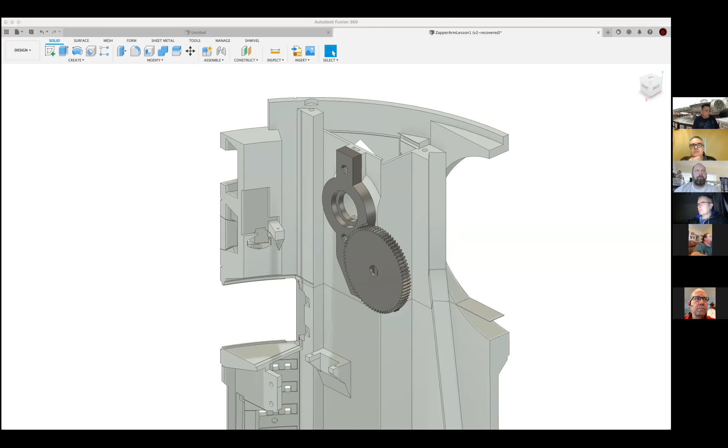And share. All right, everybody can see the Fusion screen? Yeah. All right. So this is the file where we left it before. The only thing I changed is the body rings. I just had that for context of where we are in the build. We're in the droid. And I did rename these two little pieces to magnets, because in my mind, what we were building is a little lighted zapper looking attachment that will magnetically attach to this lifter assembly.

So in my mind, we're going to send some wires through the center of this, and it's going to magnetically attach with some kind of pogo pins, and at the end we'll have some kind of laser looking thing that'll flash with lights. That's in my mind what I was designing. Whether it ends up being that or not is a different story, but right now we're just concerned on building the lifter.

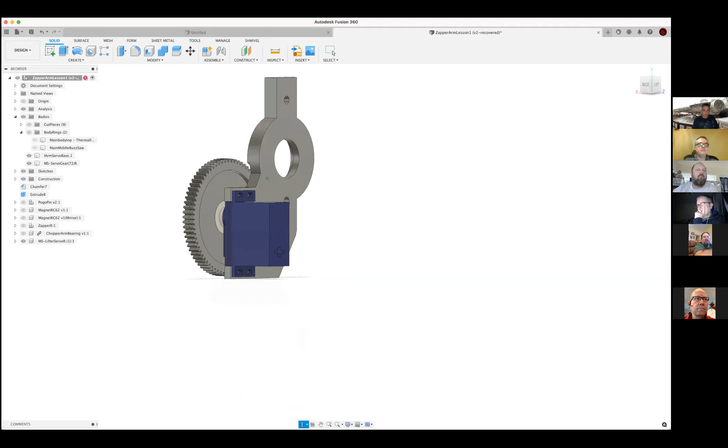So again, just as a quick recap, we have our lifter servo that we placed in here from the chopper design, and it's got the clearances set up so that gear is going to appear right where it needs to in relationship to the rest of the build. All right, so probably the first order of business is to figure out where the second gear is going to go.

And if you remember, we had a little chart that I built, with... someone's echoing. And I built a little chart with the gear teeth, and I believe it was 44 gear teeth we want on this. And let me just take a look real quick. I'll cheat and look at... yeah, 44. So what we're basically going to do is try to build this blue gear, and we'll go from there.

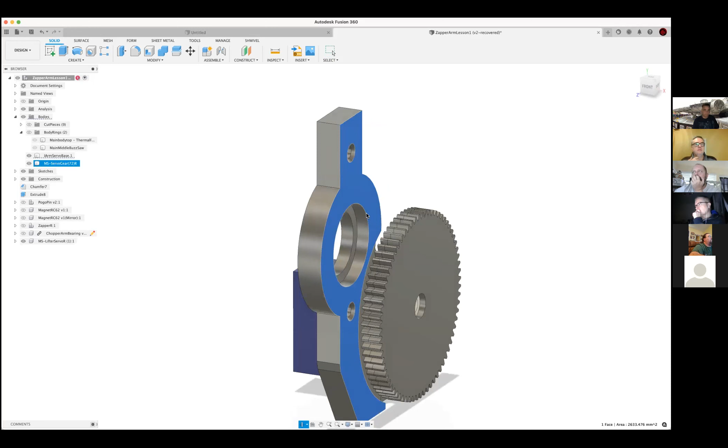All right, so where do we want that gear to sit? Actually, we know it's going to have this bearing here. So we want the gear to sit with a little clearance off of this surface here. So I'm just going to put my offset plane off that surface and say, well, 3 is probably too many. Maybe 1.5 millimeters is where I want that gear to sit in relationship to the other.

And what that does is it's going to be a slightly thinner gear, and it's going to mesh with this bigger gear, and it's going to have a little wiggle room there in case it's not perfectly aligned or perfectly flat because of the inconsistencies of 3D printing. So how do I make a gear? There's lots of ways of doing it. You can go on the internet and learn about all the math, or you can skip to the easy part where they give you tools that are built into Fusion. They're not great tools, but they work.

So if you click on the Tools tab at the top and you go to Add-ins, Scripts and Add-ins, and scroll to the bottom, you'll see there's 2 ways of putting a spur gear into your design. Here's a little caution. If you click on one of these and then try to run it, it's going to crash Fusion, because right now we're in something called direct modeling. It likes to have a timeline. So to do this, I'm just going to go to Capture Design History. Don't worry, I won't leave it on long. And you'll notice we get a little timeline show up at the bottom.

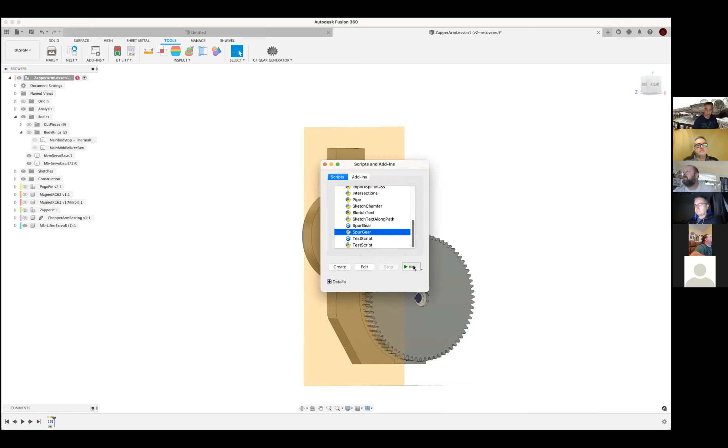So now when I go to my add-ons or add-ins, and I haven't found a functional difference between the two, but let's just say we'll pick the bottom one and hit run. And that brings up this little dialog that creates a spur gear. If you recall from our module before, I'm just going to use a module 1 because I know the other one has used a module 1. I'm going to use 44 teeth.

Backlash, I'm not going to mess with. Gear thickness, let's go with 10 millimeters. And the hole diameter, I'm just going to use that as a place marker right now. I'm going to drill the hole to something bigger. Let's just go with 3. And you notice I get a little error here. It says the root fillet can't be bigger than that. So if you're asking it to do a root fillet that's bigger than the teeth size, it has a problem.

So if we look at what it's about to generate here, it says pitch diameter is 44 because my module is 1. So I'm not doing any scaling here. I'm just using the 1 millimeter metric, and it's going to mesh because my other module is also 1, and those are required if you want your gears to mesh. And the pitch diameter is 44, and this one was 72, if you recall. So you take the radius plus the radius, and that's how far apart the centers are going to be. All right, so I'm just going to hit OK, and voila, it makes me a gear.

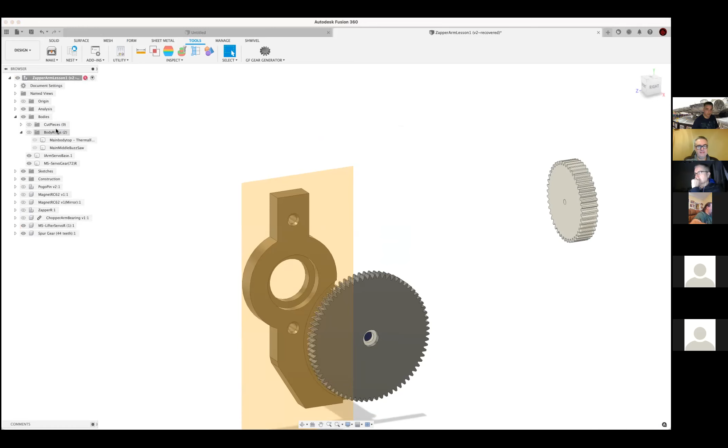You can see it appears just randomly wherever it decides that gear should be. And now, just to stay in step with everything, I'm going to go do not capture design history, and then it's going to erase my timeline, and I'm back into direct modeling mode. All right, so how am I going to get this gear over to here? Well, probably the easiest way is to go back to the solid workspace, create a sketch. We'll sketch on this plane, and for some reason Fusion likes to spin it. And then I'm going to go project include, which is the P key, and bring that geometry in. Finish sketch. And then I simply go to modify align.

And right now it's doing a component. You notice it says spur gear 44 teeth. See, it's got this little dot here. This is a component as opposed to a body. These are bodies inside of this project, and you can think of a component as a full project inside of another project. So it's like a sub project. It has all the pieces that a regular project does, like an origin, bodies, sketches. It has its own extrudes and patterns. And I like using components when I'm making complicated things because it keeps all the business of making that part contained inside the component. You don't ever have to use components, but it will make your life easier and more complicated at the same time.

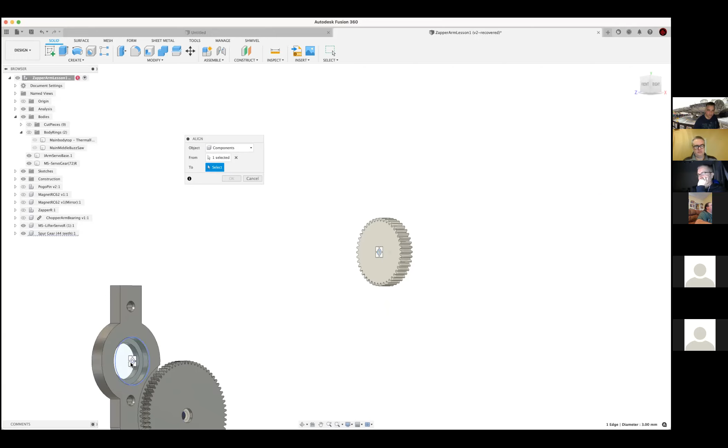All right, so object component from, and you have to be very careful of where you're picking on this thing, because whatever you pick is going to be the alignment spot. So you can see I can pick the cylinder, I can pick this ring, which is what I want right there at the center, and this little circle shows you the actual thing that's getting aligned. And I want it aligned to right there. And you can see that it easily brings it in and aligns it right to where I want it to be. If we zoom in here, it's not quite spun correctly, but that's fine. That's more cosmetic at this point.

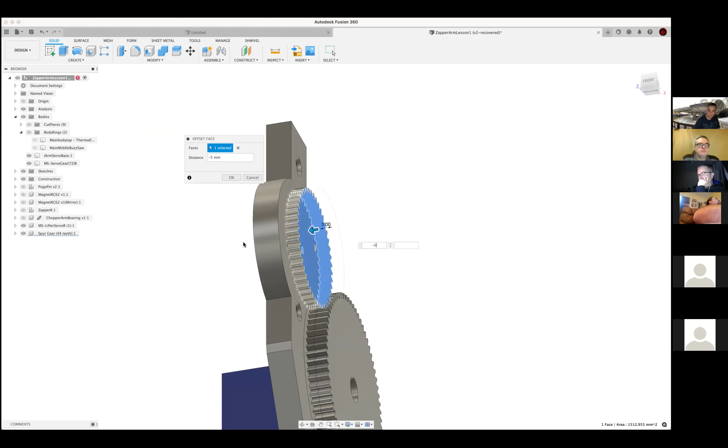But just to make it look pretty, let's spin this a little bit to make the gears mesh. Oh, because it's a component. And there we go. All right, so that looks a little thick to me. So I'm going to hit this face here. And you can hit either extrude or offset faces. I tend to do offset faces because it'll preserve the geometry. But we made it 10. Let's go with -5. That's too much. That's fine. -5. All right, so that's our gear.

And right now it's a component. If we didn't want it to be a component, we can just suck the body out. Let's name this spur gear 44. I could just pull it up into my main build here. And now I've got that body that I can work with if you didn't want to use a component. But I'm just going to leave it down there for now. So I'm going to do undo paste. And now that body should be back in here. There it is. All right, so we'll just leave it there. I'm going to turn that off for now. So that's where the gear is going to go. I'm going to turn off this sketch.

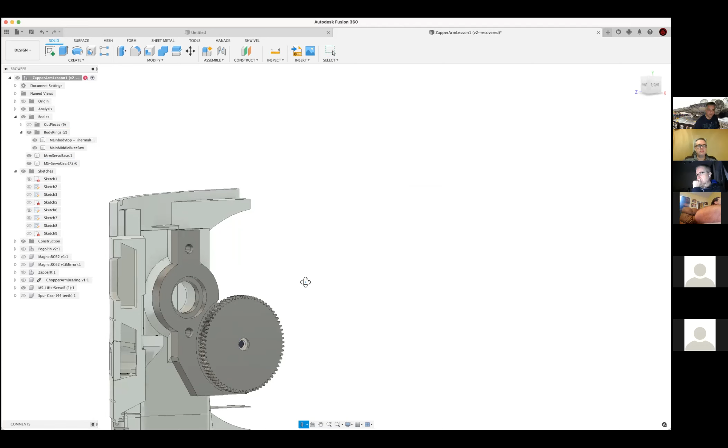But what's that gear going to ride on? Well, it's going to ride on a shaft that goes through here. With the loads we have on this and the plastic build, you could just use this as your bearing. But I found that you can get a little wobbliness in it because you make it enough clearance so that it rotates smoothly without dragging. Then it has enough clearance that it actually wobbles a little bit. Then you can have issues with it clearing your body door when it wobbles on this dimension, this plate here. So I'm going to attempt to solve that problem by putting in a bearing.

Now you can buy bearings, obviously, but in this case we're 3D printing, so we're going to 3D print our bearing, and we're going to get an advantage of that because we won't have to house the bearing inside this device. We're going to have this device be our bearing.

So Tim's question from John is, do you make the smaller gears thinner so it fully meshes with the larger one? Let me see if I can read his question. I think he means the thickness of the smaller gear is thinner than the larger one.

Yeah, the reason I chose to do that is these are out of plastic. So if these gears aren't perfectly aligned, I just want to make sure that the top gear has plenty of target to miss and still hit the gear, if that makes sense. It's just a matter of design clearances. If this was made out of metal and everything was perfectly aligned and mounted with precision, ideally these gears could be the same width.

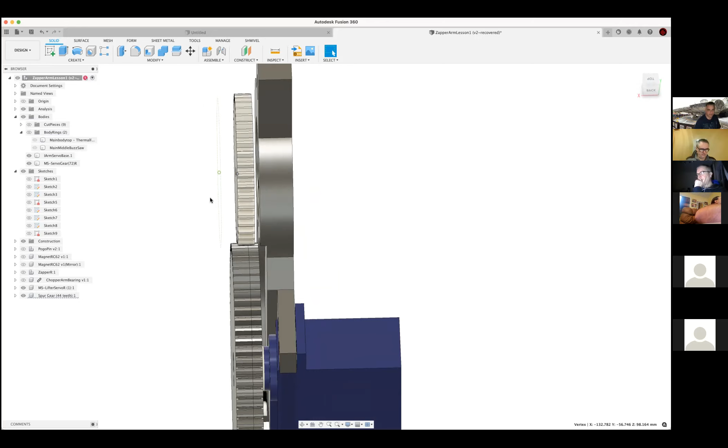This is allowing you, say when you put it together and didn't glue it quite right or whatever, it gives you a little wiggle room in the assembly process so you can still successfully put this thing together and have it work without being super precise.

So that's a built-in clearance or variability I'm allowing the design to have. Certainly I could make them both the same, but if you look at the construction of this bigger gear, what it really is is housing this servo, and I run out of space here. So I have to have this bigger gear sit proud of the servo, and then when I do that, it's too thin. You can see this little space here where I added this much back to the big gear. That gives me the clearance, because otherwise I would have to push this whole gear further out.

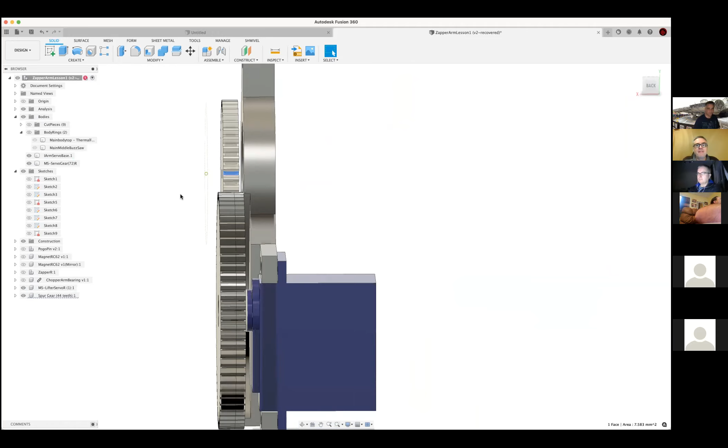And that impinges on the clearance inside the droid, like my card dispenser and chopper, perhaps. So it looks like we have a lot of space, but we really don't. I'm trying to conserve the footprint size of this overall build so that it's as small as possible, but still big enough to make it easy to assemble and use. I think that answers the question. I think it does. All right.

So somewhere in here is my chopper bearing. I'll point out this is a component, and when I click on it, you can see I have a little link here, and I have a little tool, a pencil mark. So what this means is this file is actually physically linked in my design workspace to the original chopper bearing.

So I can't edit this bearing at all at this point. If I did want to edit it, I could either open the original file or click on this little pencil. You can see it takes me into sort of a sketch mode where now I'm actually editing, and you can see that this has its timeline. This component was built using traditional Fusion timeline techniques. Then when I'm done, I end my edit in place. So if I needed to manipulate it, I certainly could.

But what I'm going to do instead is break this link, because this piece is going to get chopped up, and I don't want a reference to that original file. It's never going to be friends with it again. All right, so I just brought it in, and when I brought it into the project, you can see it's not sitting anywhere where it needs to be, and we have a few problems to solve.

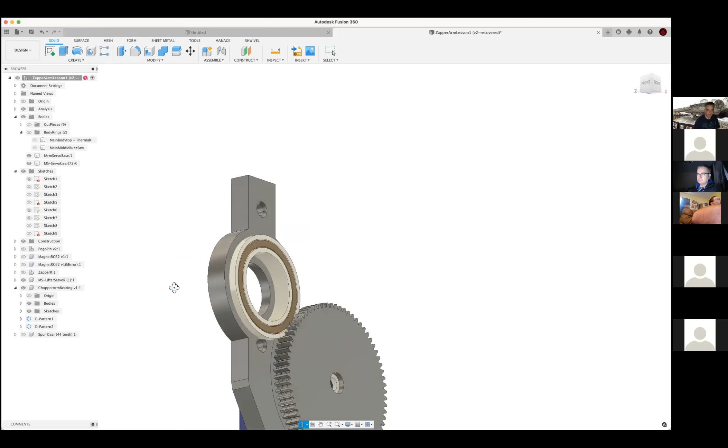So problem one, if we go to inspect from here to here, we can see that's 9 millimeters across. If I go to my place where I'm trying to put it, and inspect, it's 10 millimeters across.

So I've got a millimeter that I'm happy I have an extra millimeter of clearance, but if I just align it, it's not going to be in the center. So two ways of solving that. Probably the easiest is to align it to the center of mass, but that's more complicated. Probably easier is just to add 0.5 millimeter on both sides to make it a total of 10. So that's what I'm going to do.

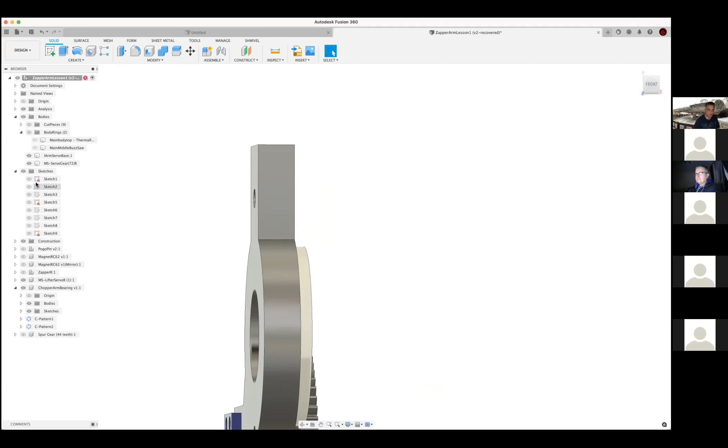I'm going to take this face here, hit Q and 0.5. You can see it grows. And on this face, I'm going to hit the alternate key to select more than one. Maybe the shift key? No, I'm using a Mac computer with a Windows keyboard, and for me it's the Windows key, which is weird. But anyway, there's whatever key it is on your computer that allows you to select more than one. You can see it's going to grow. Control, thank you, on the Windows machine. So now I've grown this by 0.5 millimeter.

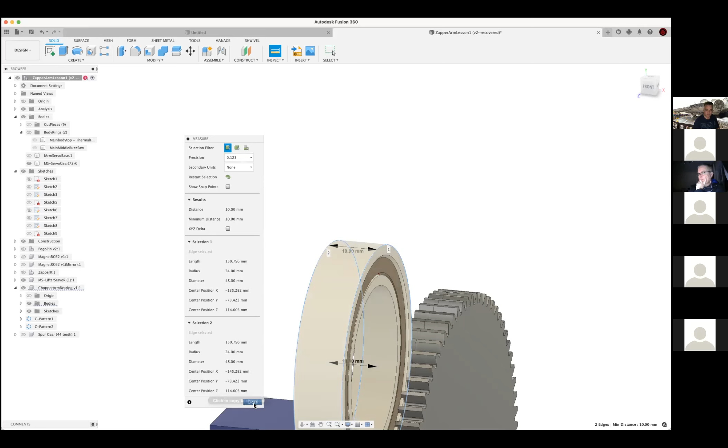I'll just double check my math real quick. I always do that to make sure I didn't fool myself. So now the bearing housing is 10 millimeters. That matches my base. So now I'm going to go to this component, chopper arm bearing, and go to align.

I'm going to turn this off, and I'm going to align this. You can see it's the center of that arc, and it really doesn't matter when you're talking circles, that's the center of the circle. And now you can see that part is embedded happily inside of the mounting bracket. So I'm happy with that.

We'll hit OK. And obviously the mounting bracket has an issue in that it doesn't have a hole for it. So let's fix that. Probably the easiest is to go to split body.

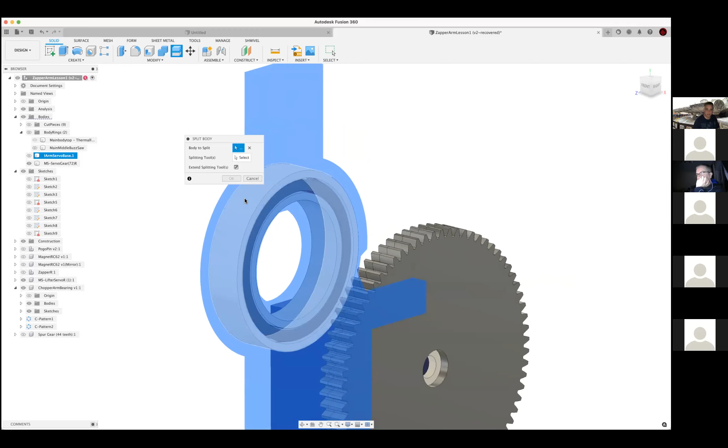And the body to split is our servo base. And the splitting tool, I'm going to turn that off for a second, is going to be this. And you can see what that does for us, let me turn this back on, it's going to cut a hole into the base. And I've got extend splitting tool.

So now, every time I split something, I always look and see what happened with my body count. And you can see that I added a body, because that makes sense, I've cut this into two pieces.

So let's turn off our gear so we can see what's going on. And there's my new spot for that bearing to live in.

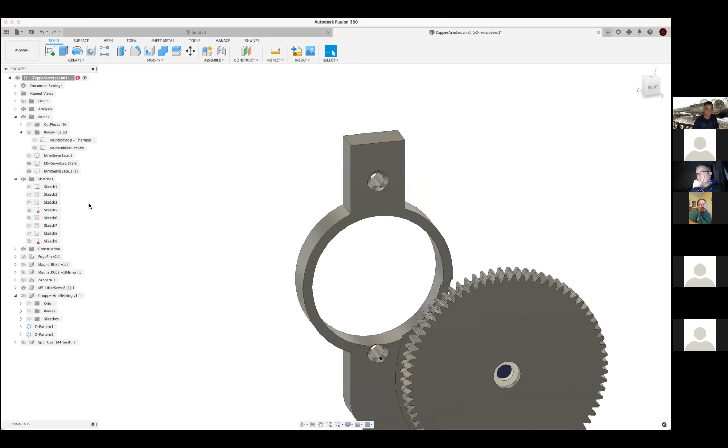So unfortunately, it chose the little part to get the appended name. So let's just delete that, I'll leave it for now. I don't think I'll need it later, but I'll just leave that for now and turn this chopper arm bearing back on. All right, so that's looking good.

Next thing I'm going to do is combine my servo base arm with the outer race of the bearing. And I'll hit OK. What I did was I merged this bearing piece into the servo arm, and you can see the end result is this outer race is now built into the servo arm, and that's going to be the basis for our bearings.

And just a little quick preview here, let me turn this cage off. You can see the bearing's going to live in that little space right there.

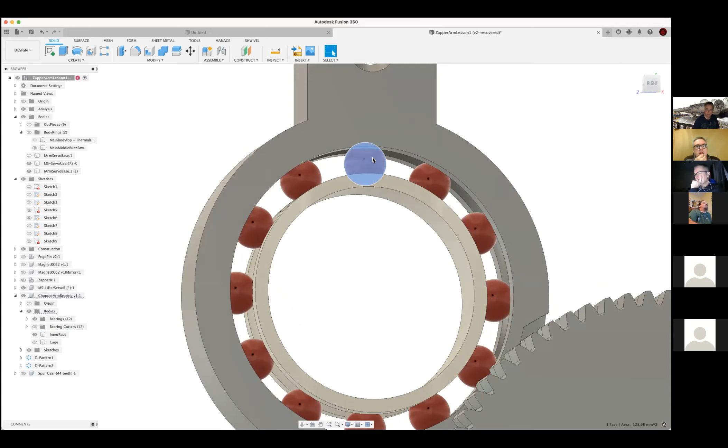Just a quick aside, a little sidebar. We're not going to talk about building the bearing, but these are just 6mm BBs that you can buy that are very precise. I took a bearing that is a metal bearing, and I looked at the clearances of how that was built, and I just mirrored that. It works really nicely when you build it in plastic. And I have a video of how to put this together because it's not entirely obvious.

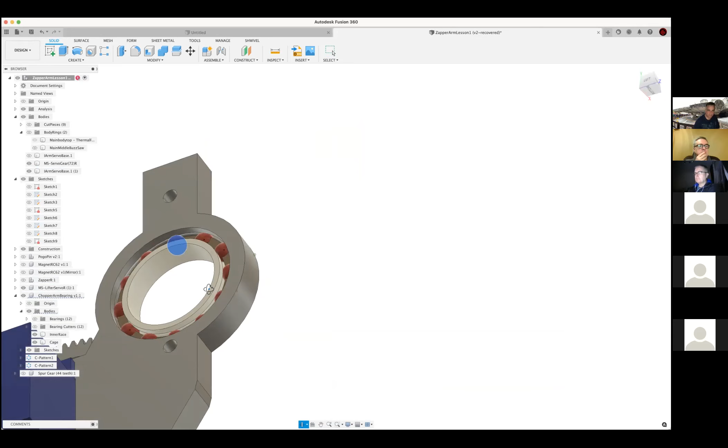All right, so I'm going to turn these bearings off, those are bearing cutters, bearings. I guess you have to kind of snap that together, do you? Yeah, basically what you do is you cover one side so the bearings don't race all over the table, and you start packing them into these spots. Eventually you put them all on one side, so they're not evenly spaced, they're all kind of bunched up, and you can snap them in. Then once the final one is snapped in, you start rotating the center, and they kind of start spreading out. And this cage isn't fully the length of the bearings, it's just a little bit over the center diameter, and this will actually snap in and hold those in their relative positions. Right, with it, yeah. All right.

So now that we've got, oops, let's turn that cage off, inner race off for now. And where are these bearings? Find in browser.

Oh, there we go. I was just wondering why it was so hard to get rid of those to go invisible.

All right, so let's go back to our spur gear, and we'll see if we can find that a home. So the way this is going to go together is that this chopper arm bearing is going to be connected to this gear.

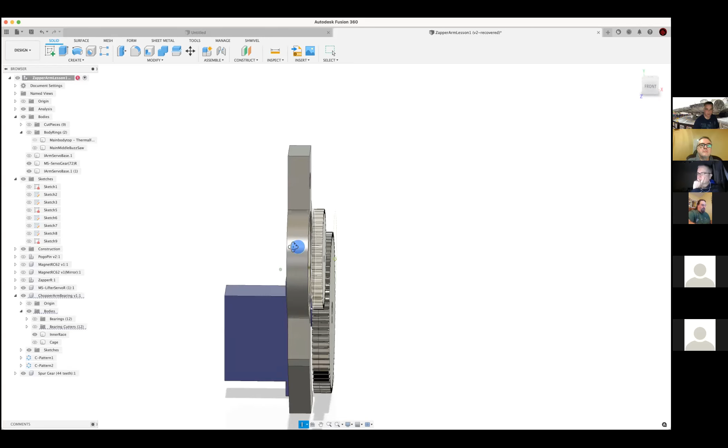Now we can either screw it to the gear, which is probably preferable when you're trying to put this together, or the gear could contain the shaft that this inner race, so we could physically connect it. And if I were to print that piece, then I would install it from the inside of the droid, and then that'll probably work. So let's just go with that for now.

So what I'm going to do is turn this off. Turn this off for a second. I'm going to grab this face here, and now here's where I like to use offset faces.

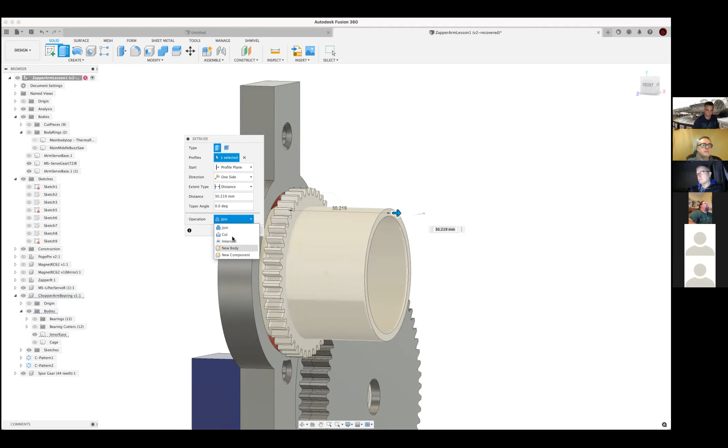If I use extrude, it's just going to make that thing bigger. And if it touches anything like this gear, it's going to want to join or cut or whatever these objects are, which could be fine, but it may or may not be what I exactly want.

Whereas if I use offset faces, I just find I have a little bit more control over what's going to happen with the relationship of these pieces without doing things I wasn't expecting. And what I mean by that is, if you go too fast with this and you start extruding things, you'll either cut things you didn't mean to by accident, or you'll join bodies that aren't supposed to be separate bodies into one body by accident.

It can be a time saver, or it can be a nightmare if you don't realize it happened until two hours later and you're like, why are these two pieces connected? When did I do that? Where if I'm doing this and I explicitly join them together, then I'm going to be better off.

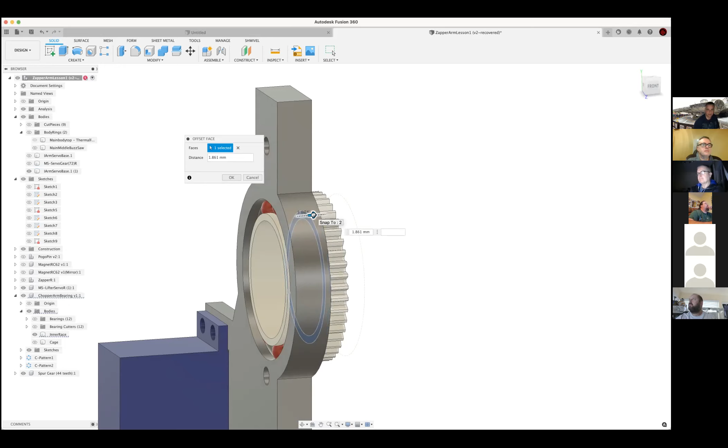So I'm just going to use this technique and just drag it towards the direction you want to go. And then I just touch the face, and then it will exactly snap to that face.

And now we're going to do a modify or a combine, this gear with this inner race, and voila. So it disappears out of my chopper bearing, and it becomes a single solid piece of this spur gear. And I'll check my bodies to make sure that it actually did what I wanted it to do.

In fact, while I'm down here, I'm going to turn these sketches off. I don't like that little dotted line. All right, so now I have a piece that will become the basis of the rest of the build.

So let's kind of review where we're at. The bearing is going to act as the hub of rotation for this gear. The servo is going to act as the hub of rotation for that gear.

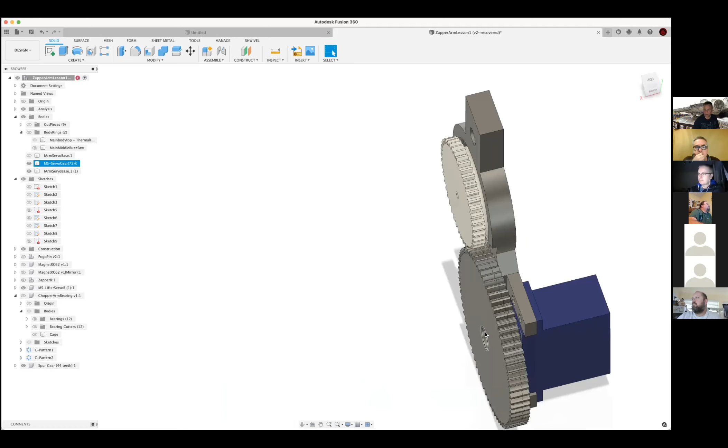And I made it look easy, but I did the math. I actually have a sketch in here somewhere, I think, there it is, where before I determined all this, I worked out the math on the size of these two gears and the distances between these hubs, because this distance and these circles, these pitch reference circles, you can see what they are is perfectly tangent. And the length of this line is the radius of this and the radius of that. And that's how far the gears go apart, plus or minus a little bit of clearance.

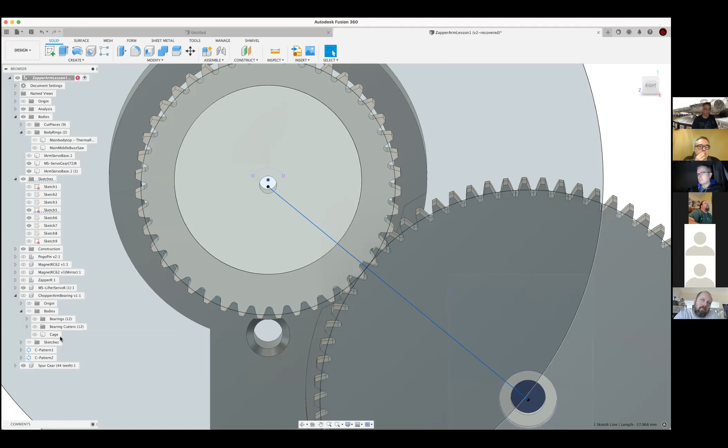Because anytime you're working with anything mechanical, you're going to have clearance, because otherwise, if you get them perfectly aligned, then they're going to be too tight. They won't function properly, or you'll put undue stress on your servo. All right.

So this little ball bearing here, that's the only thing left of the, and the cage, are the only thing left of that bearing from Chopper's arm.

So now we've got the lion's share of this work done for having this lifter do its job. The rest of the design is going to be: what's the lifter going to do, and how are we going to get this rotation through this hole and into the area over here.

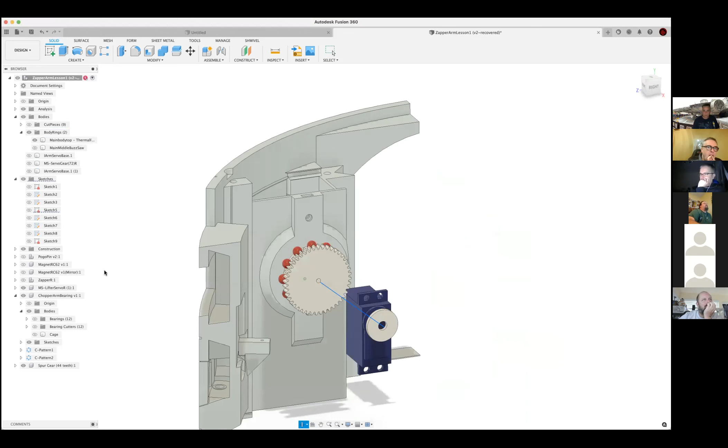Well, let's take a look at our hole and let's see what we're up against. Servo chopper off. Turn my spur gear off.

So the way this is designed is it's got two captured nuts. One comes, they're both coming from the top, and probably an M4, if I recall. Screw is going to mount that in. So let's take a look at this.

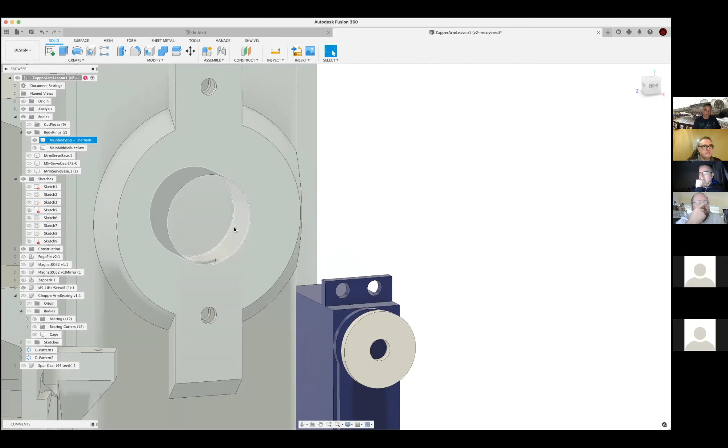Inspect. The diameter is 25. So whatever we're going to put in here has to be smaller than 25. Maybe 24. That'll give us a healthy amount of clearance on both sides, so it shouldn't rub, even if it's not a perfectly smooth print. And it'll give us a little wiggle room when we're actually mounting it, so that we can maybe work an angle.

And if we go as small as 23, that'll make it even more easy to assemble. We don't have to worry about our whole assembly wiggling, because as you recall, we're running on this bearing here, which is going to hold it in a pretty good orientation. But let's take a look at the relationship of this to this.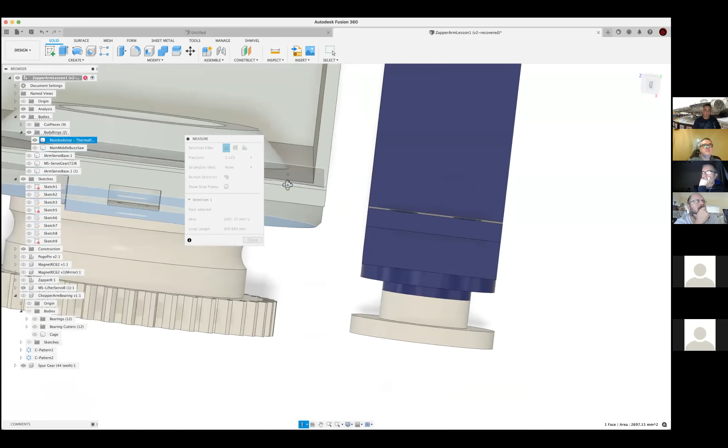That's a little bit tight, I think. Actually, we've got a millimeter of clearance, I think. Let's see what it is. Half of the problem of working with Fusion is it's only 0.5 millimeter clearance.

Let's make that a little bit more. So I'm just going to hit Q, minus 0.5, and just pull that in a little bit, so that this is not going to rub in with our body. Oh, that's my old servo base. I'll eventually delete that.

So right now we've got clearance between the spinning part and the static part in our build. So let's take this, and again, I'm going to hit Q. When you're working with circles, the number that comes up is the radius of what you're designing. So if I wanted it to be 10, that's going to give me a diameter of 20.

Inspect. See, so it can be a little confusing because most other times you pull up the Q key, you're going to get a direct number, like if you want to come back 3 millimeters. Usually what I do in that situation, if I know the exact clearance, I'll just use this and do the math right here. If I want to come in 1 millimeter or half a millimeter, you can just do the math, and you can do times 5 — it actually does the math for you. So it's really nice and handy to just type in easy equations when you're doing your work.

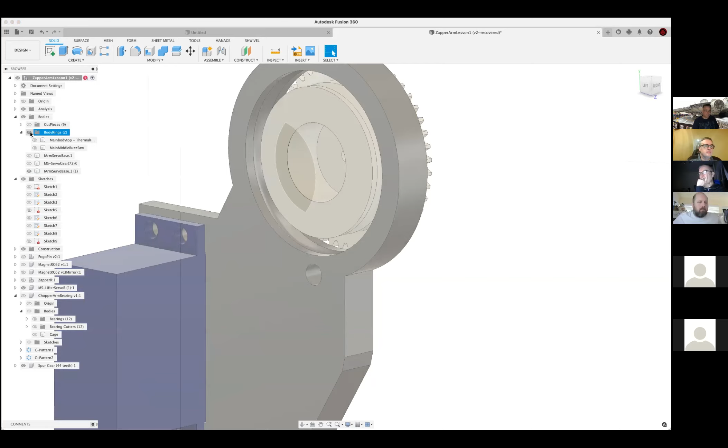So I'm going to leave this central spot open pretty much right now because I don't know exactly what we're going to do with this space, but I do know I need to get my motion translated through the walls of... where is it? Body rings. Oh, I turned them both off. I want to get the translation in through this hole.

So let's start with a sketch. Turn this off. We'll do a sketch right here. Create sketch, and we'll draw a circle based on the center here. Circle, C key, and we said our radius was 25 — let's go with the 23. Finish sketch.

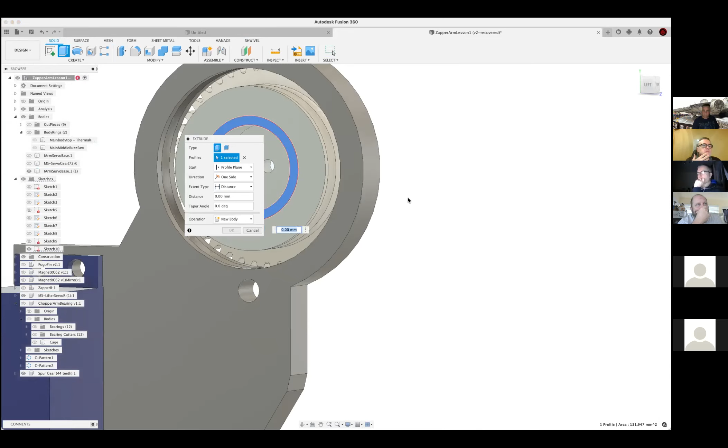So how far out does this go? Well, let's take a look. Somewhere in here, we know it has to go at least to here, which turns out to be 14. And then again, if I know I needed a 1 millimeter clearance as a minimum, I can just go plus 1, or whatever — say that wasn't exactly 14, say it was 14.358, whatever — I can just straight up add the clearance right there in my extrude command.

So, just to stay in good form, I'm going to take this and join it to that. Again, this is kind of an optional thing — you don't have to work that way, you could have just gone with a straight extrude. And I'm going to bring this into -3.

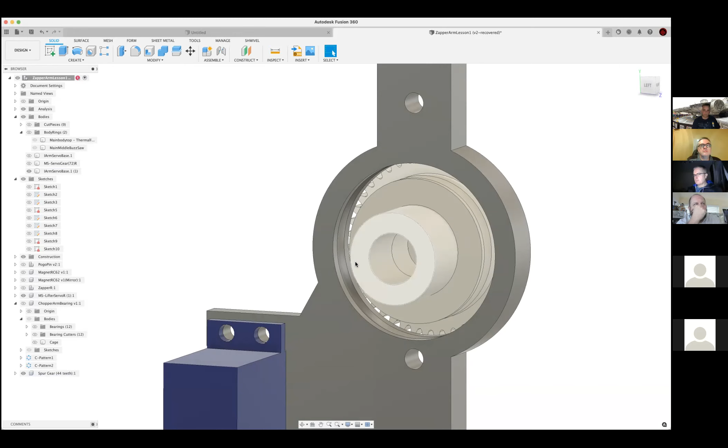So whatever we're going to pass through is going to have to go through this little channel here, which is 13 millimeters. That's pretty good. You can fit a connector with a grabber or whatever. You can fit through this hole here. Let's see with this.

All right, so anytime I'm looking at a body, I look at the detail of what is built into it. You can see I've got a face here and a face here. This should all be one face, and you can certainly leave it as is. But if you can get rid of this one, it's going to be less computational power and just a cleaner model. I kind of like keeping as few faces, or in this case, boundaries as possible. And that's just a little housekeeping thing.

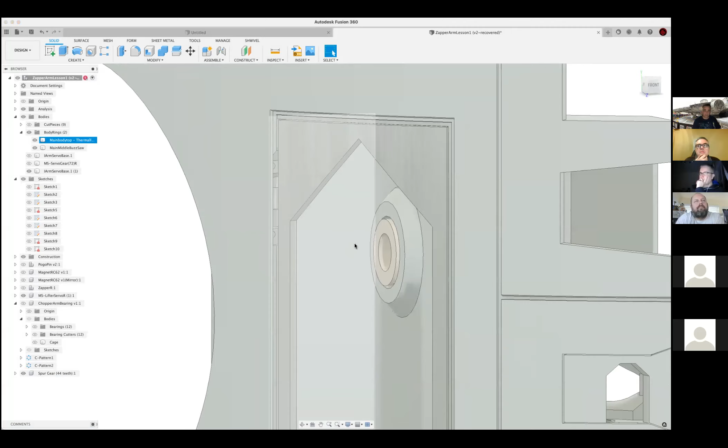All right, so let's take a look at where we're at. Now, how are we going to get this into a tube? Well, we have to have a surface to draw on, and we have to have a kind of a concept of how big our thing's going to be. So let's try to do this. Body rings off. Create sketch. Let's sketch on this surface here. And I don't know why Fusion does that, but it annoys me.

All right, so now I'm just going to bisect the center of this circle and use that as a basis of the rest of the design for the tube that's going to be the arm. So when I draw this, the things I'm paying attention to, you notice these little dots here, those are constraints. If you look up at the top, these are called coincident. So that line is coincident with the center of the circle, which is what I want. This one is a horizontal vertical. That's also what I want. I don't want some weird angle. And then this one's coincident with that. So that's half of what I want.

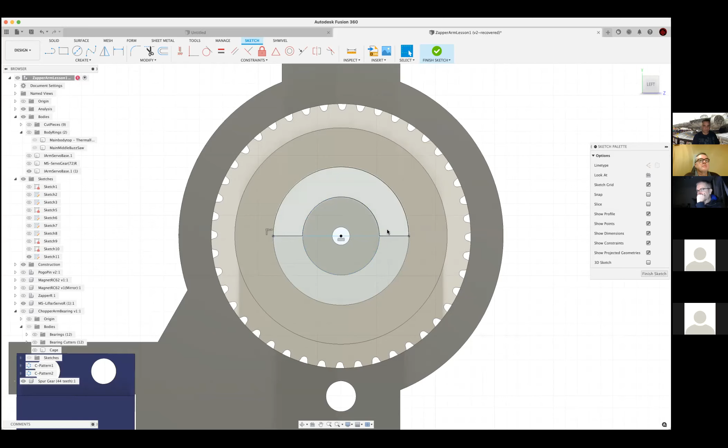Although I could use that, I'm going to extend, modify extend. And you can see now it's going to build a line that's centered on the center of the circle and goes from this tangent point to that tangent point. And that's exactly where that line is going to behave itself. And I'm going to leave that there.

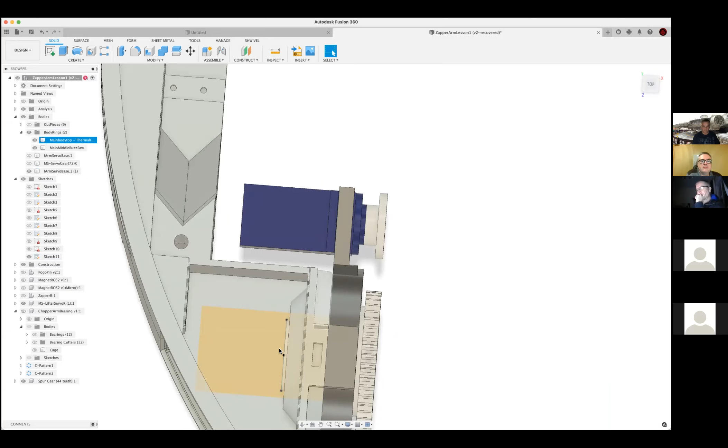And what we're going to do with that is I'm going to go to construct, plane at angle. If I can find it, here it is, plane at angle. And the line I'm going to select is this one. And it just so happened it came up with perpendicular, which is what I wanted. But if it didn't do that, I could change the angle here. I'm just going to leave it as is. And here's a little fun thing. I'm just going to drag the corner of this plane out a little bit. And that's just cosmetics, just to give myself a representation of how big a space I'm working with in my lifter. So that kind of bullseyes the center mass of that chamber.

So now we're going to put a sketch here. And again, it spun it for unknown reasons. One more. There we go. So now we want to build a tube that's kind of centered on this line here. And the center is the center of that circle. So first thing I'm going to do in my sketch is select that line and project that geometry into my sketch so I have that as a reference.

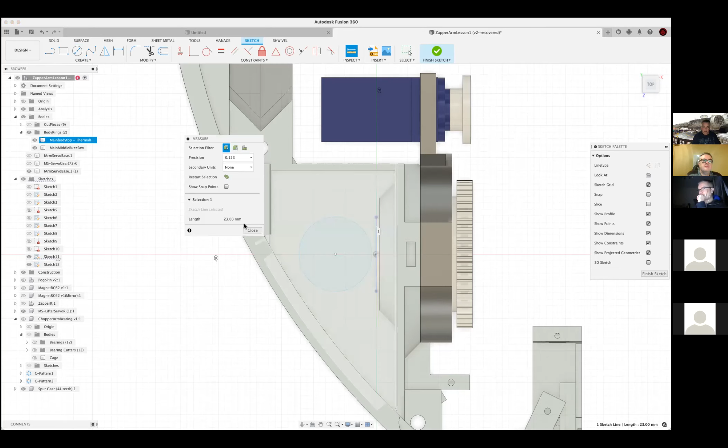And we're going to draw a circle, although we don't have to draw a circle. This zapper could have anything, but it seems like they use, for the most part, round tools. And I'm just going to randomly put a circle here and inspect. This one is 23 millimeters wide. So let's just say for fun, it doesn't have to be that wide, but it might. Let's just try making it that wide. So I hit the dimension key, click on the circle, and you can see I almost nailed it, 23. All right, so finish sketch.

So we have a circle that's kind of centered in the center of mass of our point of rotation. And I'm just going to extrude this down. And we don't know how long or how big this tool is going to be. But let's just say it's something like that for the arm. Now you notice it turned red. What that means is it's cutting through.

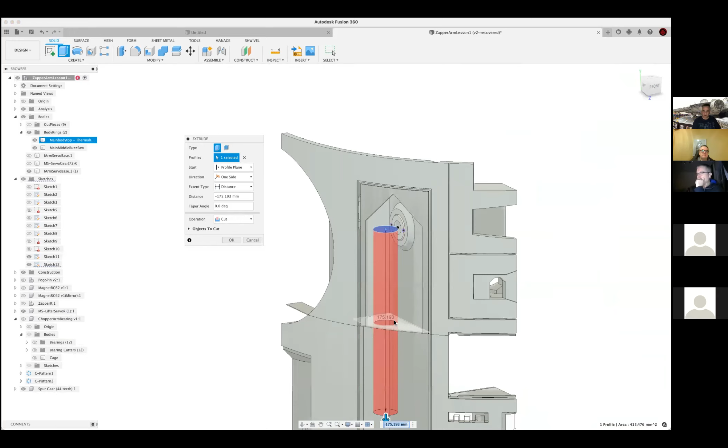On my model, what I did is I added these little thermal pads to help with warping that I cut out when I did my mod of the Mark III. I don't really want to cut that, so let's just go with new body and know that in my mind this part doesn't exist. In fact, appearance. And I'm not going to mess with that. I was going to find something transparent to put that so it wasn't as obvious. Anyway, so now how are we going to join this to this? Let's turn this body off.

And there's lots of ways of doing this. Let's see if we can find something that looks kind of cool. So let's get back to our, how are we going to put this together as one of our core concepts of,

My cat's freaking out.

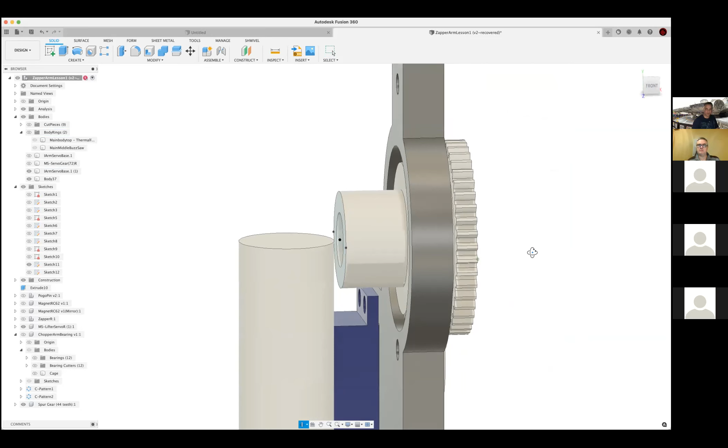One of my core concepts of how's this going to go together? Well, I imagine we'll mount the gear in the bracket and then mount the bracket to the droid. And so this little piece here is going to be sticking out. Then we have to mount this tube to that arm. So we don't want to join this all together, is my point. So there's going to be a joint here.

And to do that, I've chosen with this build, we're going to use magnets. So I went online to K&J Magnetics, and they have step files of their models of their magnets. So that's what this RC62 component is, that's a magnet. So what I want to do is have one of those magnets in the base of my gear assembly, and then one in the arm. So I want to keep that in mind.

So let's turn on magnets, turn that one off, and you can see just magically that magnet's right where I want it to be for this design. Let's just go and install that magnet real quickly. I'm going to rename it real quick so I don't lose track of it, Arm Proto. We'll turn that off. And probably the simplest way of doing this is combine the gear with my magnet.

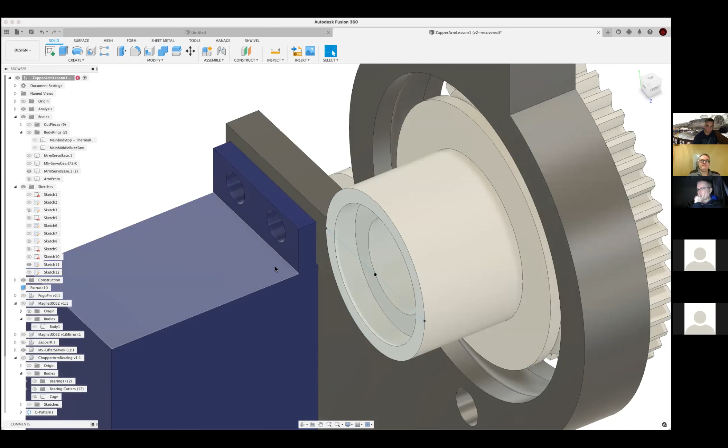And it's not liking my selection because I'm selecting a component. So I have to drill down into the bodies and, oops, not the lifter, but the magnet. And I don't want to join them. I want to cut, and I also want to keep tools so that my magnet's there for further reference. And now you can see that that magnet has a hole to live in, but with all things, we can't accept that as is.

Let me turn this sketch off real quick because it's going to have clearances. So we're probably going to put a little glue in there. I usually use super glue with a zip kicker. So let's offset this face by 0.3. We don't want to put it too deep because if we don't put enough glue in there, the magnet's going to be recessed into that gap and it's not going to touch. And we want those magnets to touch exactly.

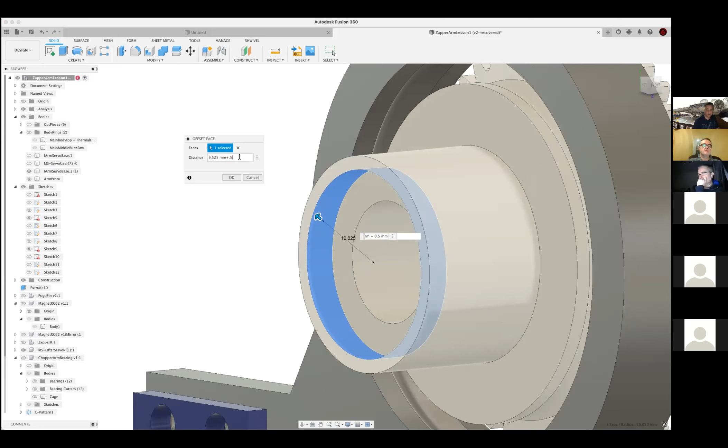So in fact, I'm going to go 0.25 because I'll have room for a little bit of glue, but I don't want it to be so much that it's sitting indented into my gear mechanism. And for the clearance here, again, this is a radius and this math gets funky to me. So let's just add 0.5 millimeter clearance because it's less important that this is exactly centered. It kind of will be naturally, but having a little slop in the rotation is not going to kill the design.

All right, so at this point, my biggest concern is the magnet having enough grabbing power not to spin when I spin my gear. I actually have these magnets, and I don't think that's going to happen, but eventually you might want to put a little tooth or a square nub on this assembly so that when it interfaces with my arm, it has a little something to transfer the torque of spinning that gear.

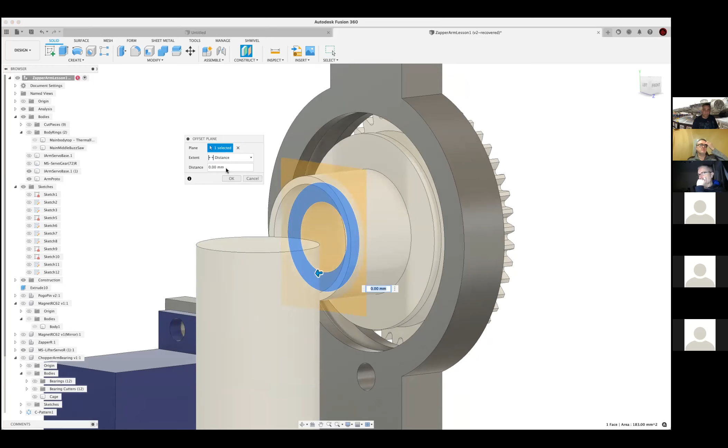All right, so for now that's our base design, and we'll go back to our prototype, and let's have a place for this magnet to live. So here's kind of a fun thing I'm going to do. I'm going to go here, construct offset plane, and I'm going to take this offset plane -1. And this is just a quick and dirty. So I'm going to split this body here. I'm going to split it with this here, hit OK.

And then I'm going to mirror this thing I just made. But now here's a problem with mirror. Notice what it did? It just mirrored that face, and that's not going to create something rational. So I got to find out where that face went and select the whole body. There we go. In fact, I don't want two selected, I just want that. And mirror plane, I'm going to select the face of that and create a new body.

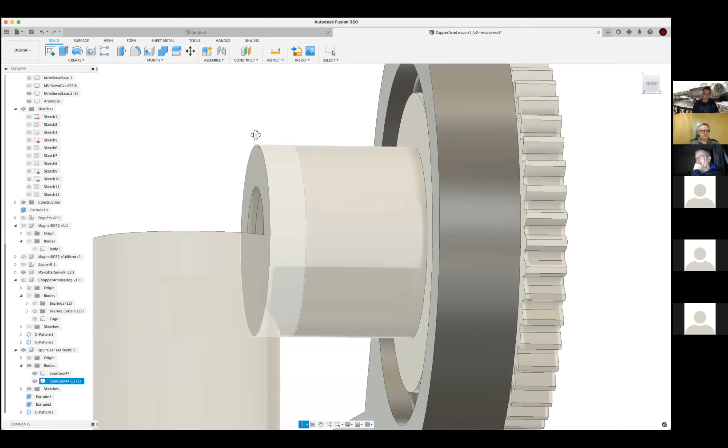And then when I'm done with that, I'm just going to put that back together. Join. And then this, I'll hit the V key, make that go invisible. And so right now that's exactly touching the other surface there. So where's that body?

So what happened is, I wasn't expecting this. This spur gear 4411 that you see here actually ended up inside the spur gear component. I don't want it there, and I don't like the name. So the first thing I do is call it arm magnet spot. I don't know what to call it. And then I'm going to right click, move to group, and we're just going to put it up into the main project here. So now it's not tangled up and caught inside my spur gear component.

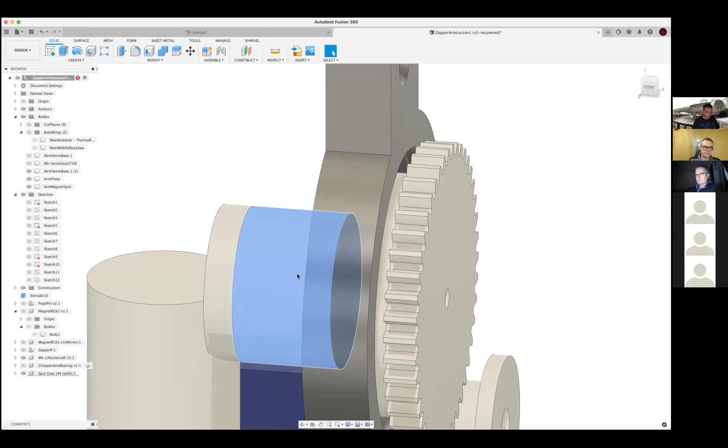All right, so just for fun, I'm going to offset this by 0.2. Let's make it 0.1. And then I'm going to offset the part I brought in by the same amount. So Q minus 0.1. So that gives me just a little bit of extra clearance in my design for those two pieces to go together. So what we're really going to do now that we've done all this preamble is make this merge nicely with that.

And let's see, this is kind of a nasty problem to solve, but you can imagine you want this to be curved in all the dimensions and meet that face there. So let's work on, and then probably this face to be curved into that face. And you might be tempted to do it with an extrude. And you could see that's kind of approaching what we want to do. If we did an extrude to here, to the halfway through,

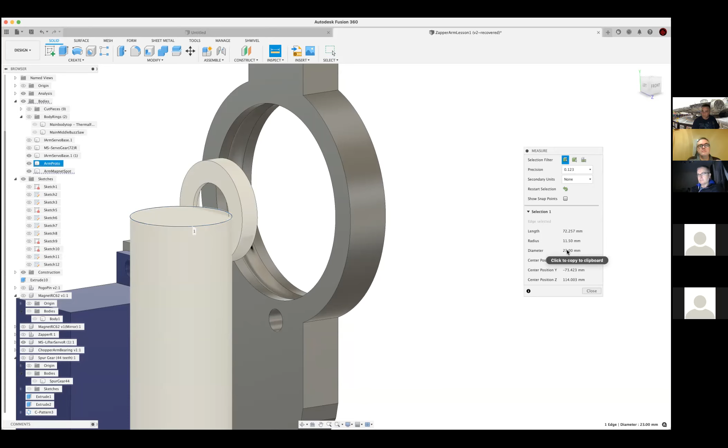23 divided by, actually, I don't remember. Let's see. So 11.5 is the radius. So if we were to extrude 11.5, that'll take us, nope, it's not. Cancel. One more time. All right, so I'm just going to put a little reference line of where I want to extrude to. Extrude to, can I grab it? No. I thought I'd be able to grab that line as a snapping point. I guess it has to be a body.

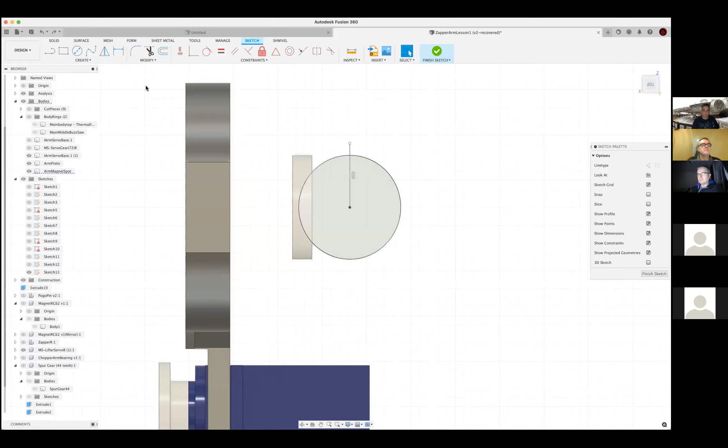So I'll tell you what I'm going to do. Undo finish sketch, and I'm going to take my extend tool like that, my trim tool T, get rid of that. I don't like having little things sticking off because that can create weird faces. And I'm just going to give it a spot to hit, and I'm happy to have those join. And even though it's 1.183, it doesn't matter. I'm just going to make it 2 because I don't like weird math.

And now I'm going to extrude this one more time. And then I'm just going to snap to that face. So I know it's right in the center of that tube. And you can see this joint looks pretty good. I like the way that's going to look, but I don't want it to join it just yet because I've got some other work to do. So I'm going to make this a new body. You can see that that gives me body 39 here.

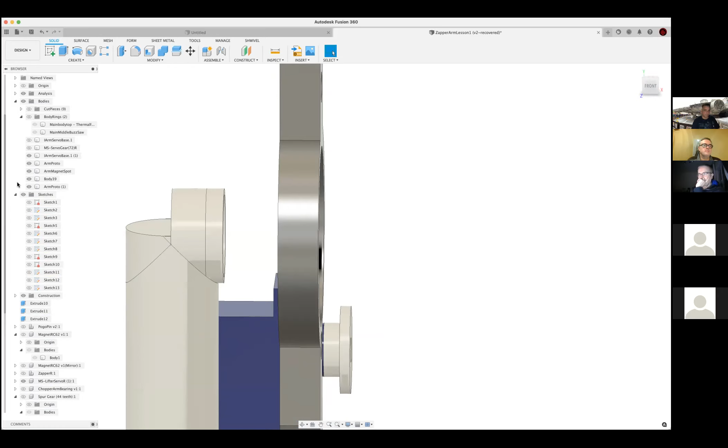So let's do this. Let's do a split body. This is the one we want to split, splitting tool, either one of these arcs. And let's turn these off for a second. And that gives us a little slice out of our arm prototype. Where'd this go? Of arm proto. So you can see we got some weird geometry here that I don't like at all. Oh, it's caused by these things here. That's why.

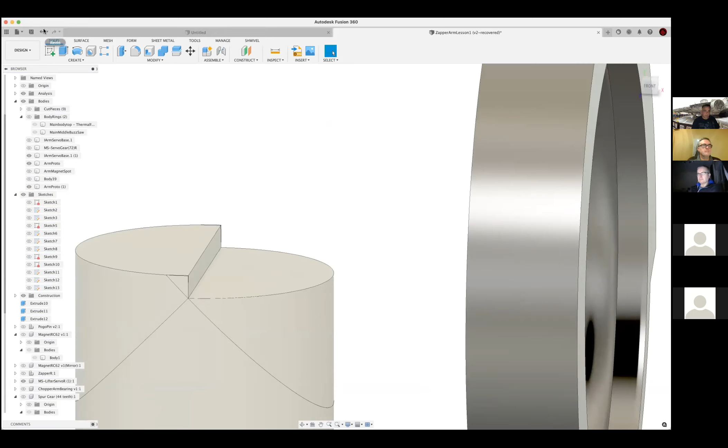So let's back up a little bit. Undo split body. What I was hoping to do there is just have a nice little cut right here that is going to end up joining there, because we've got some other geometry here we need to preserve. And I was hoping to cut it out and just delete this chunk that was resulting, but it didn't turn out as nice as I thought. So we'll just leave it as is for now. I'm going to put this back to where it was, -2. And you can see that it kind of left two faces here. I don't like that. So let's turn this off. And I'll hit the Q instead of extrude. And put that body back together.

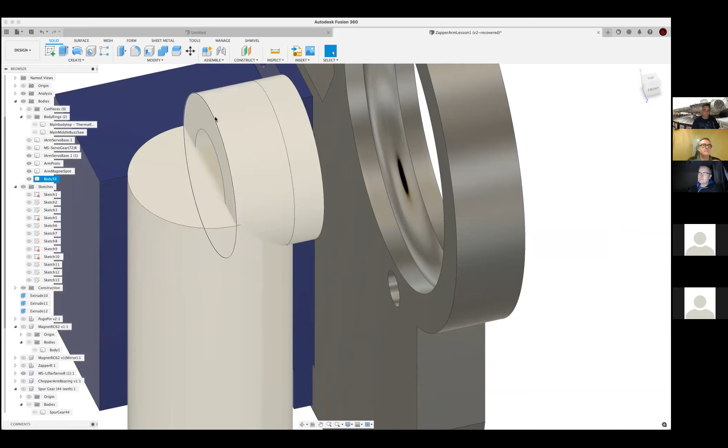All right. So what I want to do is curve this piece from here to here. And this is going to be something that is a loft. And we have to prepare for that. So create sketch here. And it's going to be a line from here to there. And I'll extend that to the other end.

And that gives me kind of a semicircle, then finish sketch. So here, I don't want this line involved in any of the math, so I'm going to hit the X key. And if you notice, it turns to a dashed line. So now when I am trying to select this geometry, I get the whole hemisphere as opposed to an arc.

And the last thing I need here is a line from the very center of that to the edge of that. So now I've got 2 quarters.

Don't worry, that phone is just going to ring in the background. Nobody I know calls me on that phone.

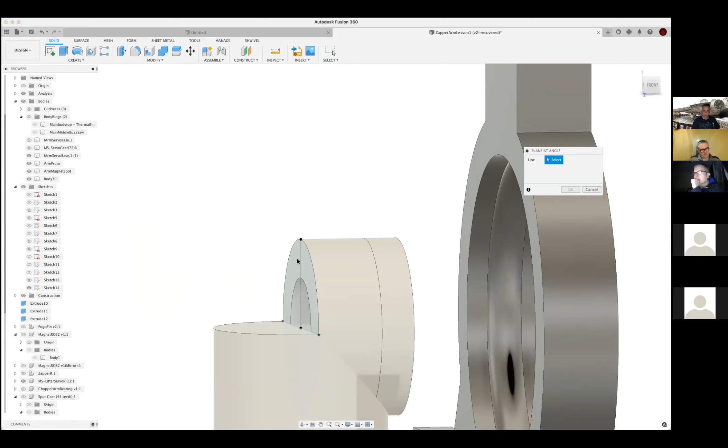All right, so the last thing we need is a little guide rail for our loft that goes from here to here. So probably the easiest way of getting that is to go to construct, plane at angle, pick this line here, and it's created a nice perpendicular plane for us to draw on. I'll hit OK. And now we're going to create a sketch on that plane.

So for curves, do we have a question? Okay.

I'm just going to take the curved line. First, let's bring in some geometry. So I'm going to click this, hit project. I'm going to click this. So I've got 2 items selected, so I'll be able to grab that point and hit OK. And what we want to do is draw a nice, cool looking curve from here to here. So I'll hit the spline button, grab this piece, and I'll put one here and then this piece.

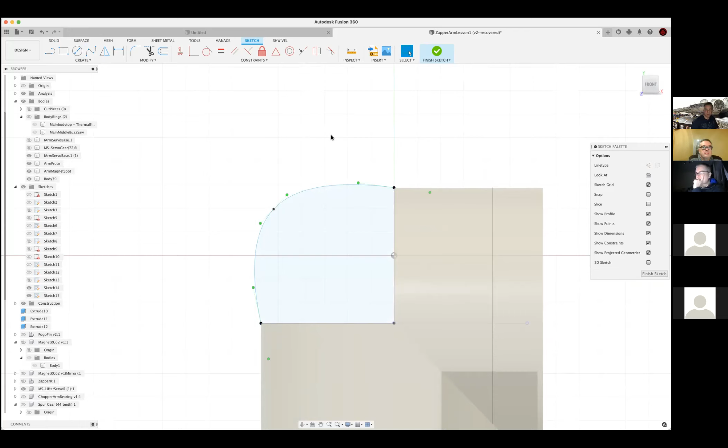When working with splines, less is more. If you put way too many points, it'll create a more complicated curve, but it's also gonna be more complicated for you to manage that curve. So I may have been able to get away with 2 points as opposed to 3, but I'm just gonna go with 3. So if I don't want a weird bump, this has to be tangent to this face here.

And since this is perpendicular, I can cheat and just make this little arm horizontal. And now this is tangent to that. I'm going to do the same thing here, so there's not going to be a weird bump as these two surfaces join each other. And now I just have to manage how I want this. You know what? I'm going to get rid of this point. I can create this curve where I like it just by using 2 points. How's that look? Reasonable? Yeah.

I think it does. All right, so now what I'm going to do is create a loft. And I think I can do it as a solid, but if not, I'll have to go to... you know what? I'm missing a face. I need another sketch on this face here. Create sketch. And

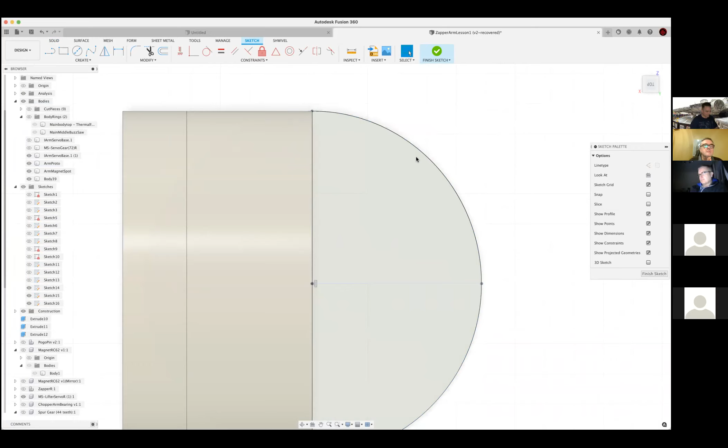now what I just did is something risky. I just eyeballed where that should go, and I don't know if I actually hit it or not. So I'm going to not even take that risk. I'm going to go back to where I was before, just start at the center, go to a known point here, and extend it. There. So now I have, I think I need this one too. So undo.

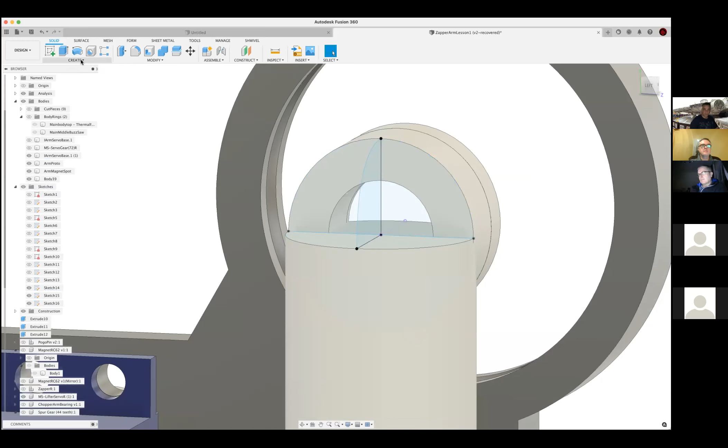All right, so now let's try this create loft again. And then, oh, I think I've got too many faces. Create loft. And then this may work, guide rail. Oh, don't extend the chain. All right. That's not working. Try one more time.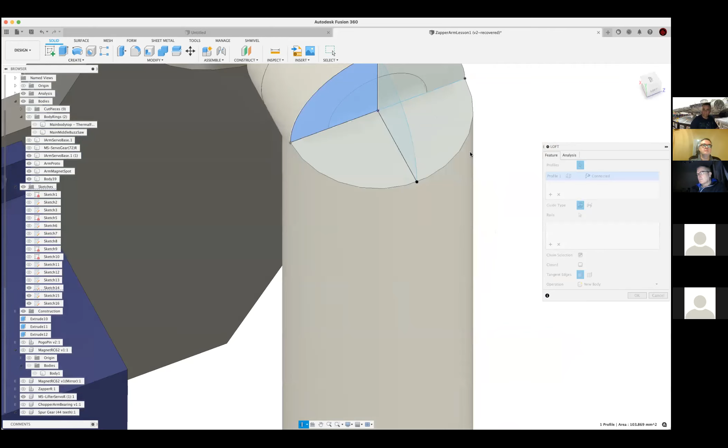I need this to bow out a little bit more, and I thought I'd be able to grab this surface here and have it follow that as a guide rail. But it says loft cannot be created, try changing the input. So the problem I'm getting here, see how the rail that I'm selecting is the whole arc. That's too far, and it doesn't understand that math. So we need to break this line up in our sketch.

Edit sketch. And I thought that I had. Let's select this and hit X.

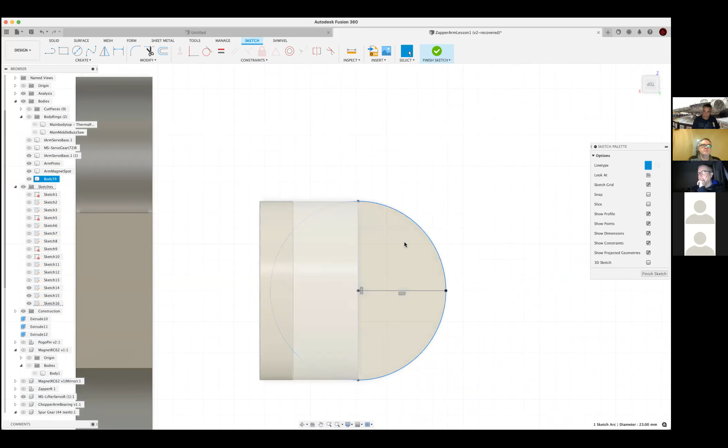I don't use loft very often, so that's why I'm kind of fumbling a little bit here.

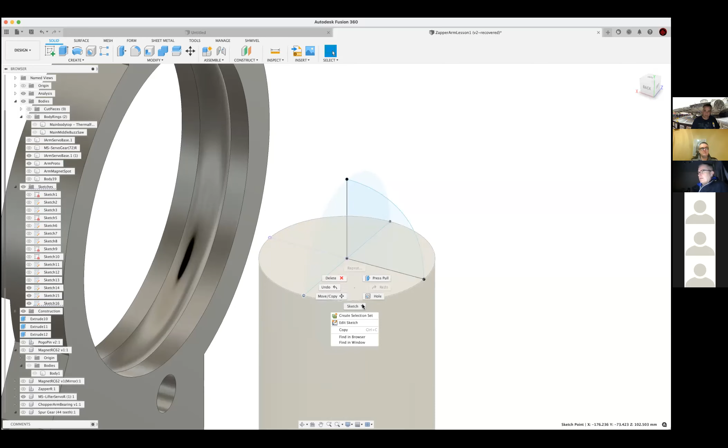Tim, can I ask a quick question? Sure. Did that not work because of that radius you created? Is it not the same diameter as the tube you're trying to replicate? This radius here, profile 2? No, this radius and this radius are the same. Right, okay, the wild card is this arc we drew. The problem is I need an arc from this point around the out to that point. So to do that, and this is not very elegant, but I'm just going to create an arc.

That is what I want by using the arc, center point arc, and go from here to there to there. So now my wayward loft should be working. So here to here to here, and then rails, I'm going to use that. Oh, come on.

It says rail is not smooth. Well, this worked in the practice, believe it or not. These things can be tricky. So let me try one last time, and then I think I got this. I guess you could do a revolve on that, couldn't you, Tim?

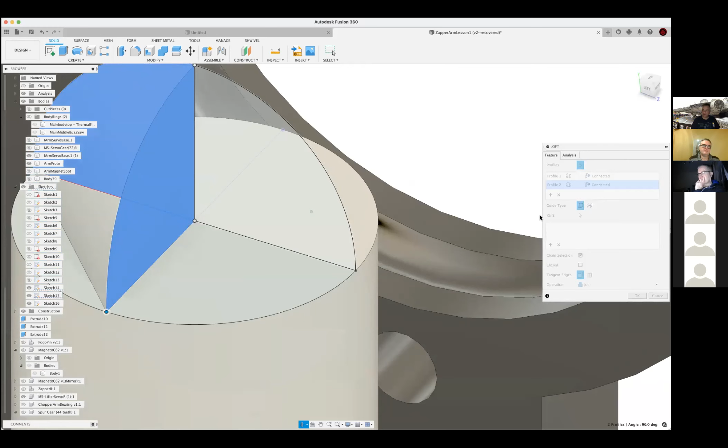You could, and that's a good point. Sometimes you get stuck trying to do a particular feature, and you end up spending a lot of time working on that, only to realize now you need to watch a couple YouTube videos. But your suggestion is probably the most expedient here at this point.

And angle to here, 90. That's probably the easiest way of doing it. I have to look at my lofting. So I'm not going to make that a join, I'm just making a new body. And then we'll get rid of this nasty lofting sketches and turn these bodies back on.

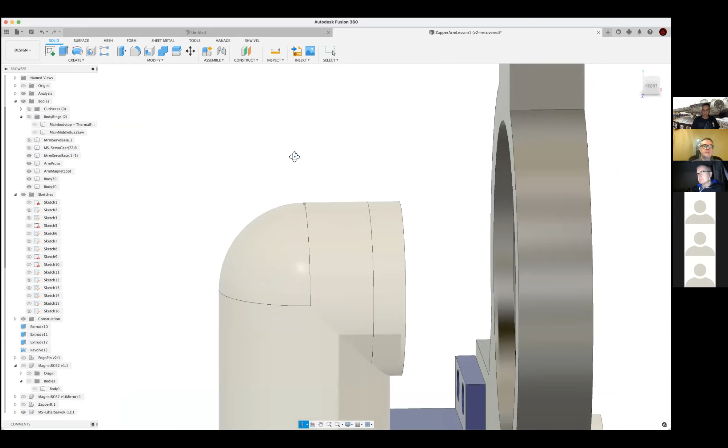And you can see kind of where we're going with all this. I think it was the profile that you created using, what's the tool called? The bendy line. Didn't match. Yeah, sorry, so the spline didn't match the profile of the circle. So where you were doing it from, it's probably having to shift that profile out very slightly to the middle bit and then back again, which probably confused it.

Yeah, like I said, those splines are hard to work with. And when I did this for my example, where is it here, you can see I created a nice one, I used the lofting commands for all that. But either way, for the purpose of instruction, I will have to revisit my lofting chops to be able to recreate something that is smooth.

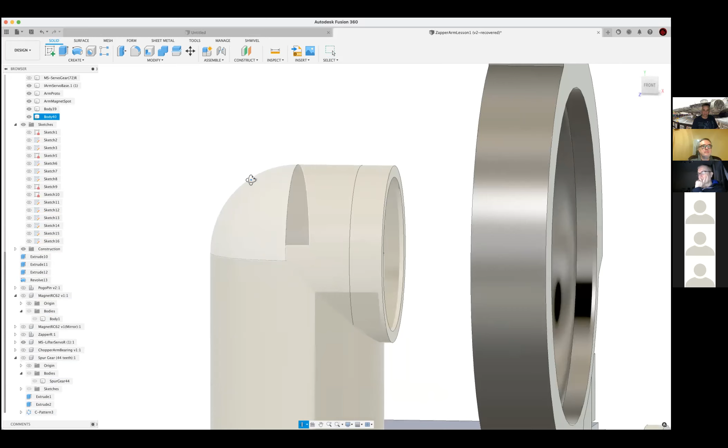So that's looking like a pretty good arm. And now I just have to slice this up, cut a hole in it, and join all these pieces together. And I'll have a usable magnetically attached lifter arm that can be then turned into some kind of a tool at the end.

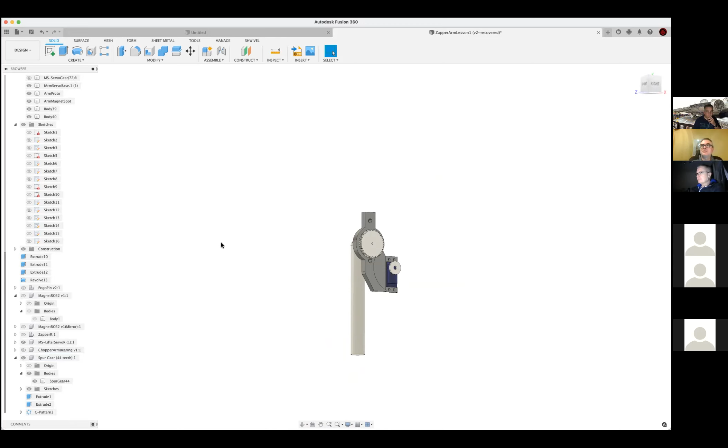And we've been going for an hour. Do we want to kind of stop it here, or open up for a couple of questions if anybody has any things that I glossed over? Yeah, we can open it for questions if anybody's got any questions, observations, or comments.

Hey, this is John. From the very beginning, I could kind of see the train of thought of where you were going with it. I think the way you explained it was really, really good because I could kind of anticipate the next steps, and it makes a lot of sense to me. So I'll just have to give it a shot building it, but I think it was very well explained.

Well, thank you. When I approach a design, I'll spend a lot of time not drawing anything, but just kind of visualizing the problems I need to solve. Because as you design more and more, you kind of have a little bag of tricks and ways you go at putting things together. And you could see me guessing on some of the clearances. That's just kind of based on experience. I'm not looking at a table of this clearance is required here, and therefore that's what I clicked on. But you kind of do land on some presets based on your nozzle and the material you're working with as first guesses. And I say first guesses because if we were to print this out, we'd find some problem we didn't realize and then have to iterate a little bit on it.

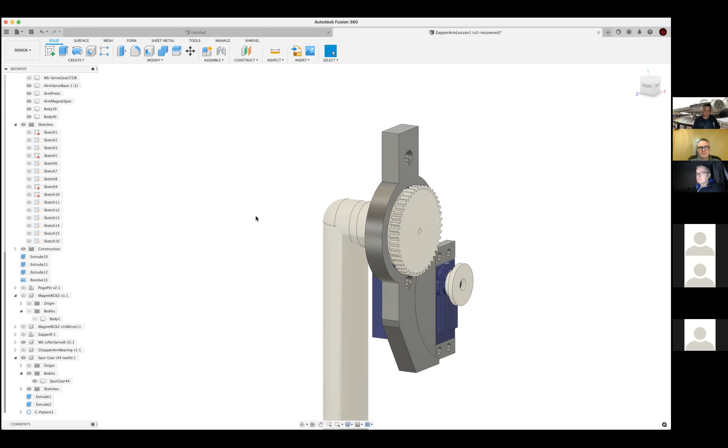Yeah, visualize, not necessarily with this, but with other types of things that I create. I can get pretty close, and I understand exactly what you're saying. You can get close, but with Fusion 360 and the different faces and angles and combining bodies, I could see where if you just try to wing it, you might end up with things not computing right. Yeah, and I always try to go with the fewest amount of faces as possible, and I always zoom in on things. Like, see how this little tail right here? There may be something funny with that joint. If I were to try to combine these two together, would that be something that cause a problem down the line?

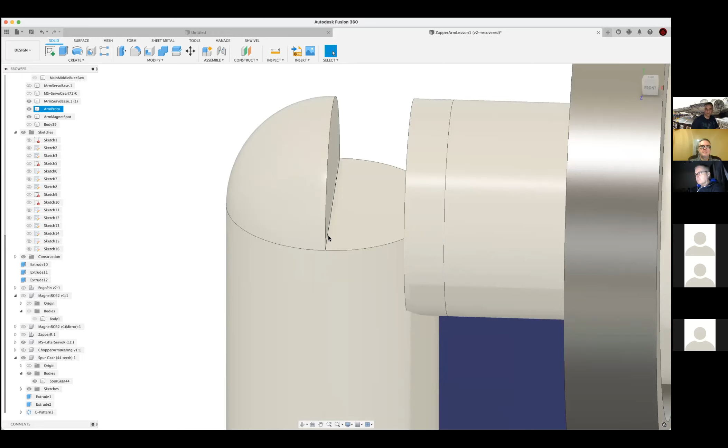It looks like it goes together now, but later you may find that little tail, that extra face, or that thing that didn't merge perfectly. When you start manipulating it, the manipulation could fail because there's some kind of infinity math in there—they don't actually quite touch, or they're touching at an angle so acute or obtuse that it causes the calculation to fail. So I'm always on the lookout for weird looking geometry, extra faces that don't belong, and I try to solve them when they show up so I don't have to deal with them later when modifying things.

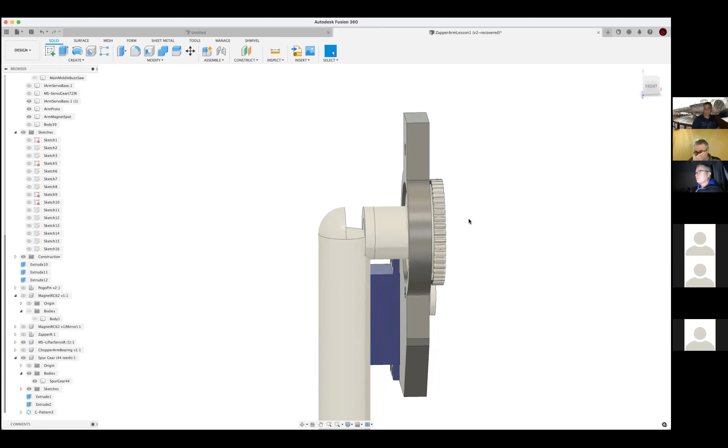Well, if we have a third one of these, what I'd like to do is a deep dive into components—particularly how to use components, moving things, to get predictable motion, or at least an idea of what motion to expect. To make motion work, everything has to be a component, and you can define joints. That's basically what I'd like to talk about—driving your joints, getting the range of motion, and an idea of what this component will actually do in the wild. So maybe if you guys want to do another one, we could dive into how I've made that little bit of wizardry, or black magic, work.

Yeah, I think that'd be superb, Tim.

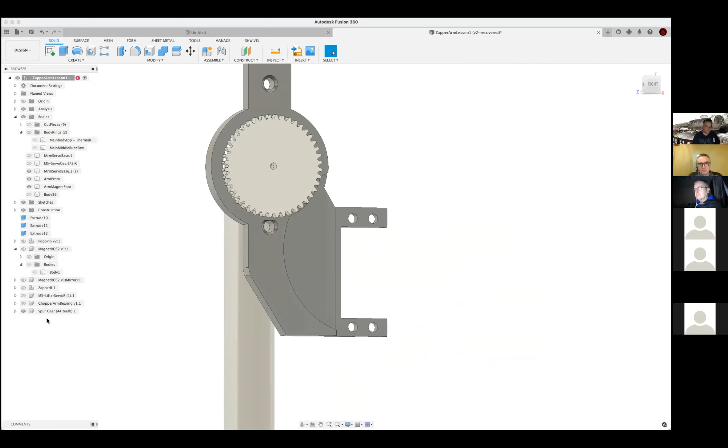It'd be useful, because the fun of Fusion is it's layers upon layers upon layers. When we went through the Gonk, that's the very basics—how you create solid objects and link them together. What we're digging into here is more detail around sketches, constraints, and components, and some more advanced stuff like creating gears and the tolerances associated with it. So jumping into components and how you link them together from an animation perspective, I think would be really useful.

Yeah, it's all fun—it's like deciding to build a Rubik's Cube. First you have to design it, then you have to solve it. Yeah, the biggest design challenge is what mechanism do you actually choose for the problem you're trying to solve. That's what I always find. It's different than grabbing something somebody else has already done and tweaking it a little, versus actually starting from complete scratch and figuring out how it fits together.

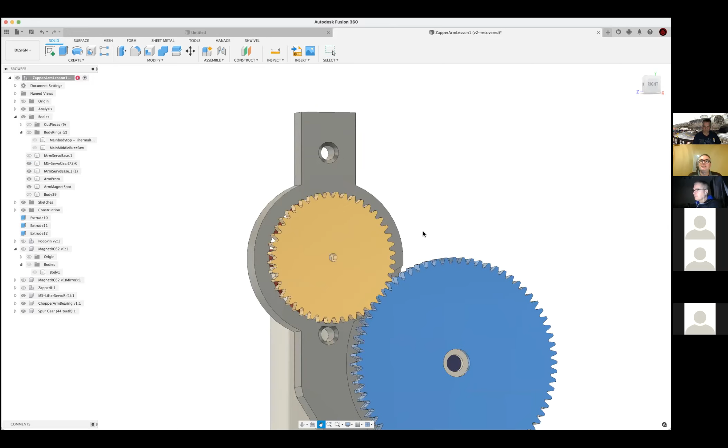The other failing I have translating from Fusion to the real world is generally assembly—I won't leave holes for screws, or I'll forget you need a big hole there to get a screwdriver and a screw in. I just assume you can somehow get tiny little elves in there to attach it all together. Then you have to redesign it to put all the assembly holes and constraints in.

That's one of the things I talked about in the design concept—how does this go together? How do I envision this being assembled, and what order do they go together in? Because it's very easy to design something like a ship in a bottle that you can't actually put together. Yeah, exactly.